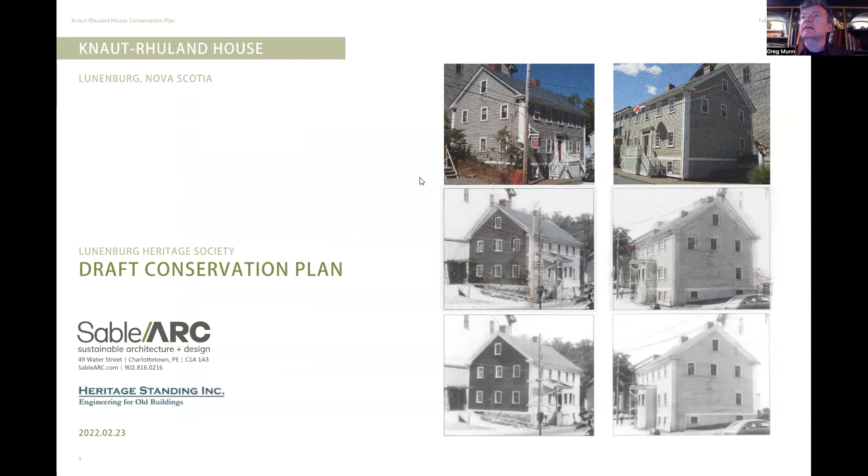We're going to go through our objectives and methodology, and briefly the format of the plan, and we are going to focus on those items that we have discovered in the house that could require repairs, restoration, even some new construction. We also have some programming ideas that could potentially better fulfill your mission and vision. And the treatment alternatives are those items that are not specifically about maintenance of existing conditions of the house, but are added treatments to consider in the future.

And then we are going to present initial cost estimates, and I will just put out a word of caution on these numbers. We are still working on the estimates. It's an estimated estimate at the moment. I've bumped the numbers up just a little bit, so if the final numbers come in better than what they're showing, that's great. If they're kind of the same, it's always a shock to see prices and costs of things. But it's a work in progress, so take that with a grain of salt. We will have that tightened down a little bit more when we present the final.

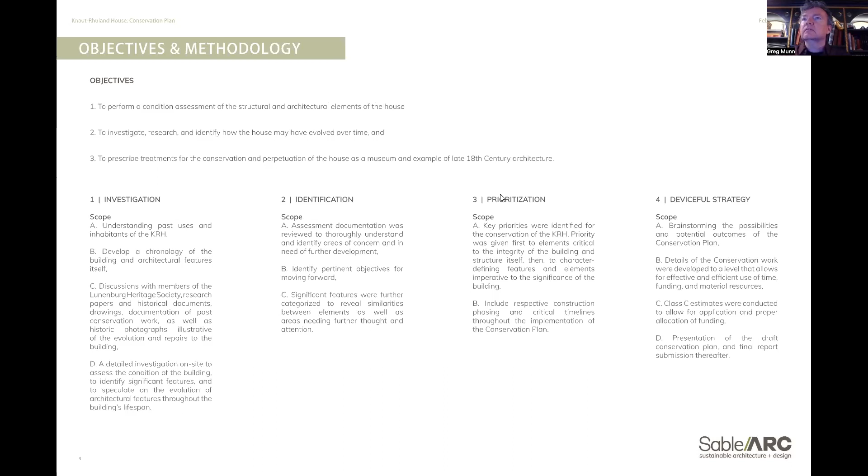And when we evaluated the material of the house, we have this developed rating system from excellent, good, fair, and poor. So those items that were in poor are, of course, the high priority items. I think that's all I need to say, that's pretty self-explanatory.

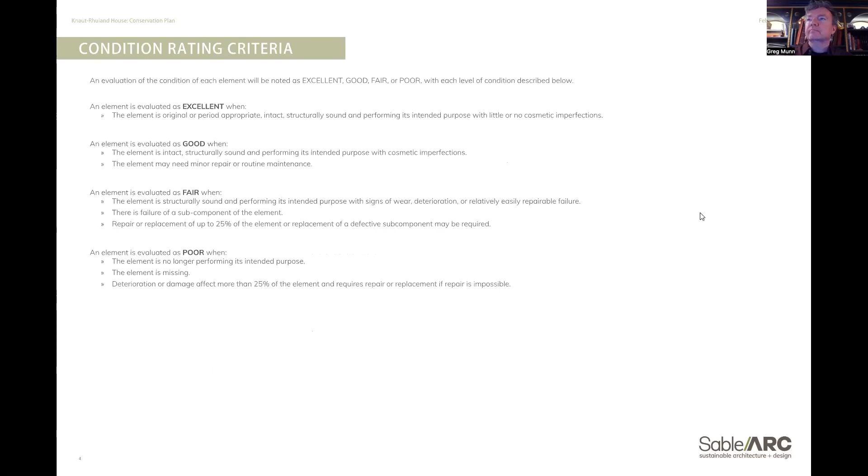This is the overall report. We have the project background and the methodology written out, and you'll be able to read what that is about. There was a lot of background to put into this report. We have the history of the house, taken from the two previous reports that were done several years ago. We also have support material, the Venice Charter and the Parks Canada designation of the house, identifying the historic features and the reason that the house is a listed designated historic property.

So from that, we go into the report of the condition assessment, and we look at the site, the exterior of the house, and then we go room by room. That is not part of the presentation tonight, that is again in the report, but it's a description of what is there right now, talking about such things as on the interior, floors, ceilings, walls, trim, doors, like every type of material broken down and then assessed for condition.

And then in treatment and use, that is where we have the condition assessment. As I mentioned, we assess the condition of each of those elements in each of the spaces. And then treatment and use, there's programmatic considerations, talking a little bit again about the vision and some things that could be part of a reparation or a restoration. They can go in a couple of different directions depending on how you see the museum moving forward in the future. This report is primarily about the condition of the building today, but it really starts to ask those questions about what you want to see, how you see the museum tomorrow, and maybe start to put into place some planning and strategies to evolve the property.

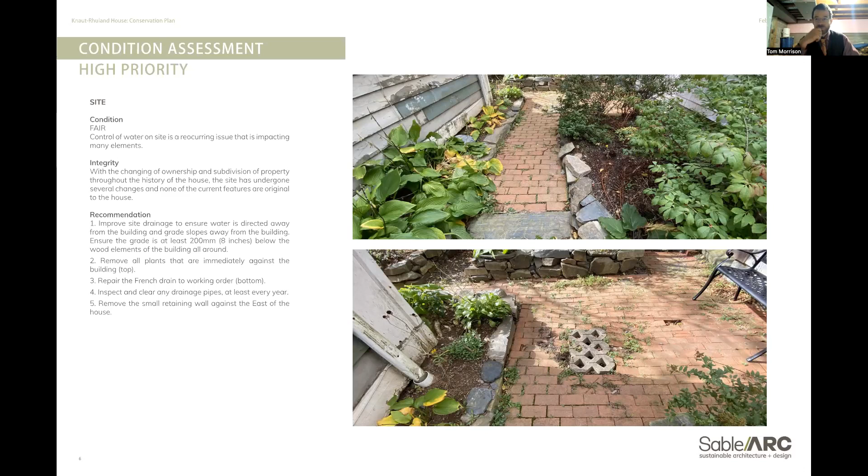Yeah. And this is further to your investigation, Tom. So if you want to keep going with this part.

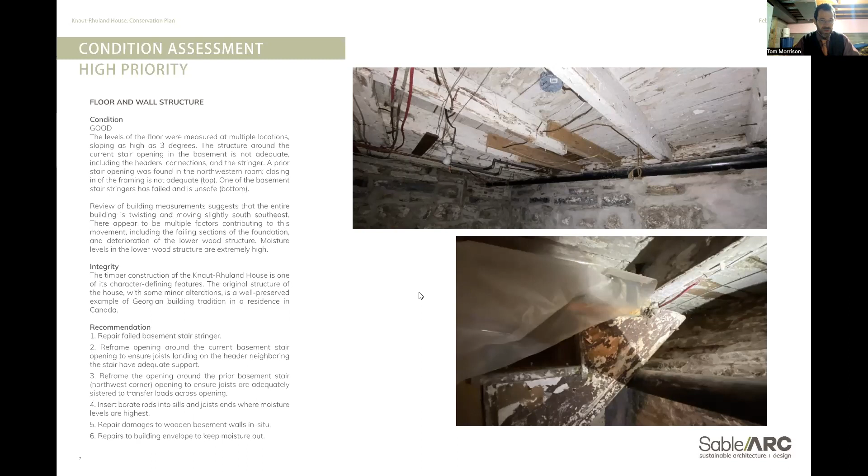There are some questions that fit into what Greg and Monica are looking at on this vision, reflecting what you're going to want to do, and how that space can be used, so you can most practically address it without impacting any of your value. Same very much for that lower picture, where one piece has failed - it's an issue, it has to be dealt with, but it's not a big worry in my mind, just something that has to be fixed. I think the slides you prepared, the next one has a bigger discussion point - oh no, it was the masonry further along, sorry, I got them mixed up.

Similarly with the roof structure down through the buildings - when I was going through it, I could notice there's a bunch of movement and different stress in the roof. I actually do the opposite - Greg and Monica, I often start at the top of the building and work my way down. There were little things like the fact they had adjusted where this chimney was located at some point in the past, and they'd cut through the prior rafter. So something should be done to make that work properly.

There's a bit of patching around it, but when I look at the wood, there's more stress on it than there should be. Considering how easy it is for water to get in at different joints, and movements in the roof causing wear and tear, you don't want to just leave it - it's better to fix it, because that will help your other things work better. The other stresses in the roof were suggesting something odd, so we spent some time mapping it out and looking at different theories. It also matched very much what we saw in the basement, which maybe is the next slide.

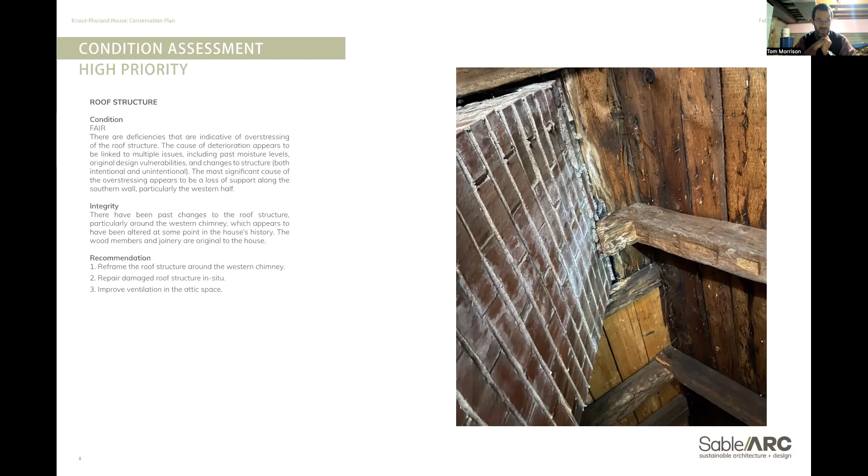There's not a whole lot of support in one corner of the building because the foundation walls more or less failed. Looking through the foundations, we'll start with the obvious one in that front corner. The stones are moving out, things aren't being held properly where they should be. It leads to that wall in the basement not being supported properly, so that wall starts to drop down.

And because a whole building works together, it doesn't always work how you intend it to, or how it's designed to, but it all ends up working together. So when that wall starts wanting to drop, the roof structure starts trying to pull it up, and that causes your roof to twist, and causes all these weird movements throughout the building.

So our dominant theory is that most of these issues are fairly related, and you just need to start by making sure there's something solid at the bottom. That's going to be a continuation of prior masonry work.

In the other areas there were some questions. It would be worth monitoring what happens with the other foundations, because there's a different way they repaired it, and when they did it, I guess that was last year. If monitoring over the next few years shows it's great, then no problem - there's no point undoing anything.

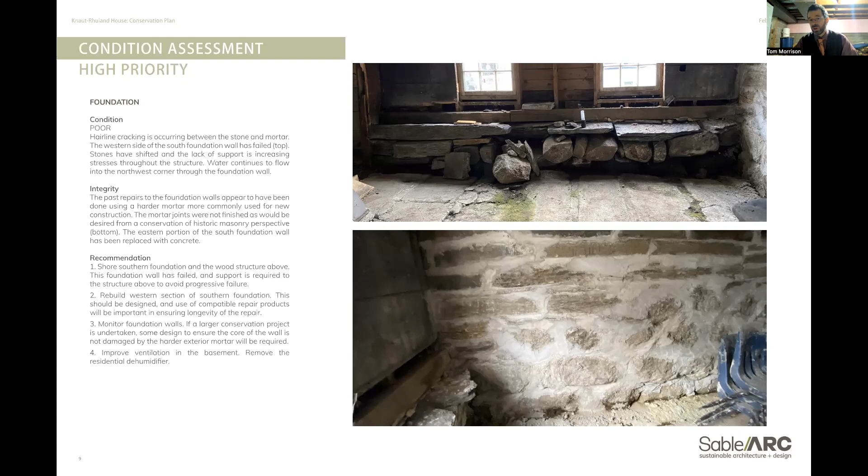The extent of the wall there that needs to be done isn't huge, and then the other areas will take bit by bit. I think that covers the main point.

People are free to interrupt me too, because I never know how much detail to get into. And I could talk for hours just on a masonry wall and probably bore most people to tears while I would be thoroughly enjoying it.

Greg, did you want to talk on chimneys, or were you thinking I would chat on that? Oh yeah, you go ahead on chimneys as well. Okay.

So just looking through the chimneys, again establishing what's going well, what's not. In that lower room, I think there's seen as a lot of potential, and I would tend to agree from my experience - there's a lot of potential for how it could be used.

The main fireplace has been bricked up, the masonry had taken quite a beating. So this requires a little bit of a careful touch to get the full value and benefit of the space you could create there, and seeing what's possible really.

In some of the upper rooms, some of the lintels were starting to corrode. There's some movement around stonework. Sorry, the lintel being that metal bar Monica's showing - thank you, Monica, it's just a metal bar put across.

That suggests to me these fireplaces have been rebuilt a few times, because the type of metal that appears to be used isn't something that would have been in use for the period of the house. Not necessarily a big deal - every house is a bit of a changing story, but just something to be aware of.

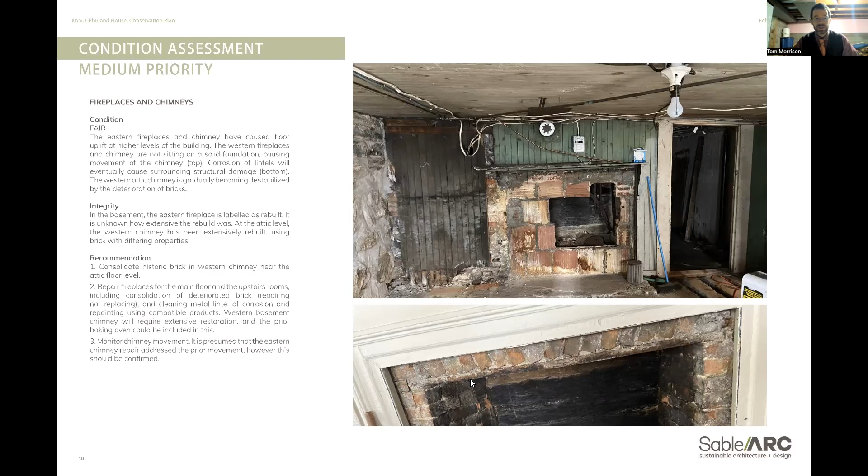So as you repair it, these are little repairs that you can address as you go to make it operable to meet your needs. I think that covers the main points. I don't want to take up too much time here. Yeah, no, that's great, thank you.

We will get back to talking about chimneys when we talk about the kitchen in a few minutes, and we can start talking about the potential to restore those chimneys to working order.

But we're going to go now to the exterior of the house. It's quite obvious to see, but it's really fun to see these up close photographs that the clapboards, for instance, on the front of the house, the south side, have been replaced in recent years, but the clapboards on the two sides and the rear have not.

None of them are original to the house. There just wouldn't be any that would have lasted quite that long. One thing we noticed is that the clapboards on the front have a narrower profile than the clapboards on the sides and rear. So the to-weather dimension there is different.

So what we have done is we have added cost into the estimate to repair the clapboards. At some point they will have to be replaced, as in any house with shingles or clapboards, and at that time it's recommended that they all have the same profile.

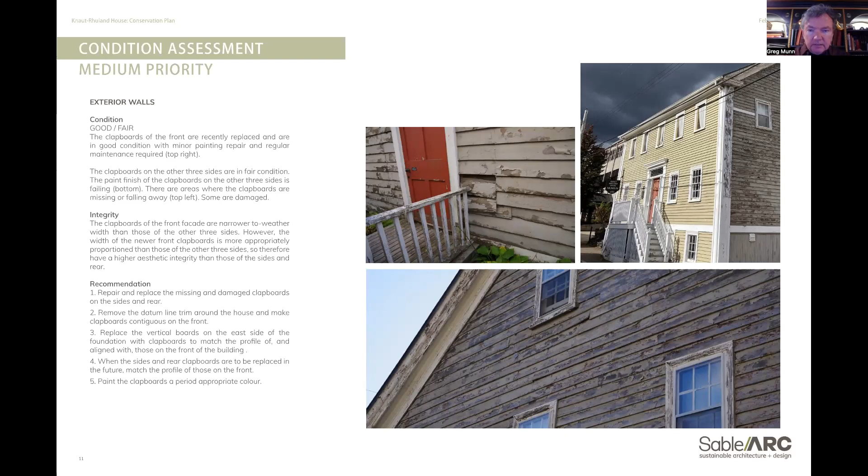And of course, that would be great. I'm all about historic color, so it'd be nice to research some historic colors for the exterior.

So then we go on to the trim. I will say these are some examples that are in poor condition. A lot of it needs work, it's better to repair than replace, but you can see some of those corner boards need to be replaced. The eave returns at the top there with the bracket seem to be in good enough condition to be repaired, but they should be repaired sooner than later.

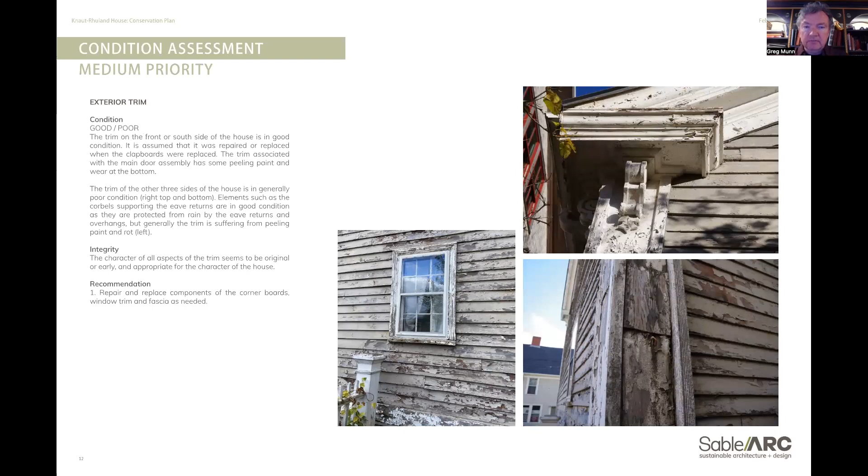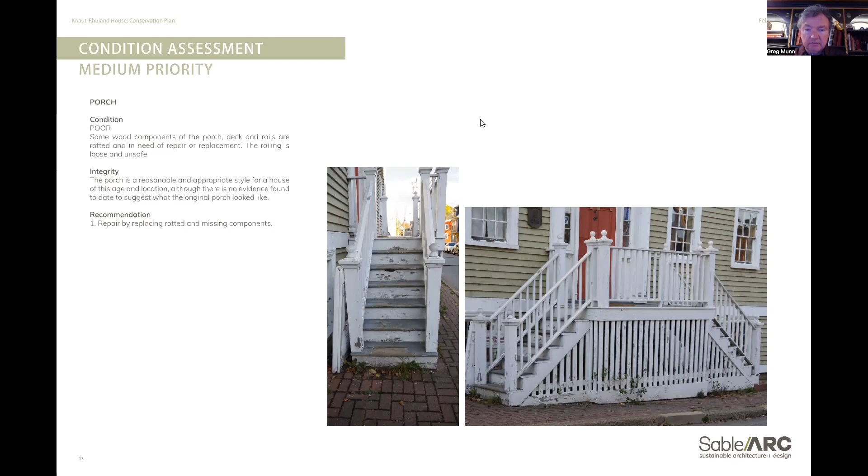And then on the porch, there's just some loose pieces, some rot. We don't have records of exactly what that porch looked like, but it was probably pretty close to this. So that's quite good, but it is loose and needs some repair. There's just some rot there.

Again, we're going over these elements quite quickly, but on the interior, we looked at the drywall over top of the plaster walls, and just for authenticity's sake, it would be a nice idea to remove the drywall and the pegboard, and maybe have some displays in these rooms that do not cover up the walls.

But this would mean repairing the plaster, and I would guess—we of course didn't look behind the drywall—but it was likely put up because the plaster was in rough shape. We have pricing in here for plaster repair, and it could be a medium priority idea.

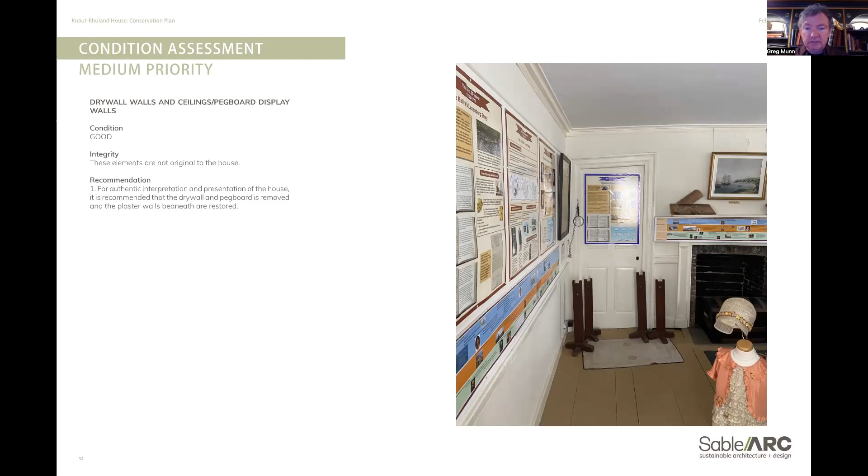I want to say overall, the house is in quite good condition overall. These are just things, a lot of them just things to keep up on, maintenance, like the exterior items that once they start going downhill, they go downhill quickly.

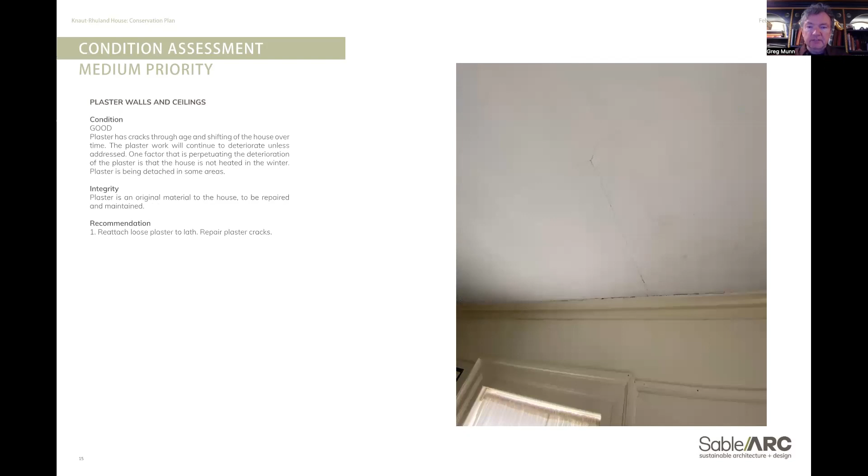And the plaster again, there are methods to reattach any loose bits to the lath above and cutting out the cracked bits and repairing, just to keep it from deteriorating.

So, mechanical system. There's baseboard heaters hither and yon throughout the house, and currently the house is not heated in the winter. We highly recommend that you put in a program to heat the house through the winter.

This is contributing to the cracking plaster, the plaster loosening from the lath, and also the subsidence of the house itself. It needs to be kept at a steady temperature, it doesn't have to be high.

You don't have to open the house or make it comfortable for human presence, but it would be a good idea to keep the house heated through the winter. We have a mechanical engineer consultant on the team, and of course we don't want to touch any historic fabric if we don't have to, so ductwork is out of the question. Where would you put the ducts? You don't want to build chases or knock holes into things.

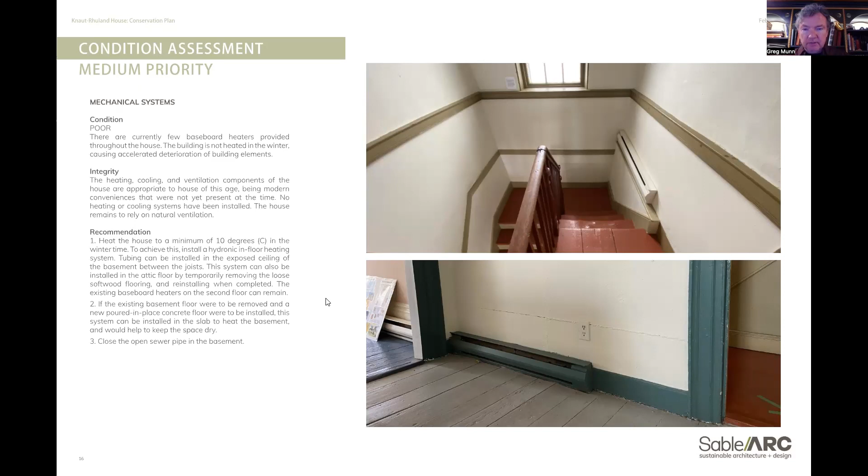You have an exposed ceiling on the main floor from the basement side, so you could install the hydronic system between the joists on the main floor. In the attic, you could also have it in the floor—those loose boards, you could put it in those spaces.

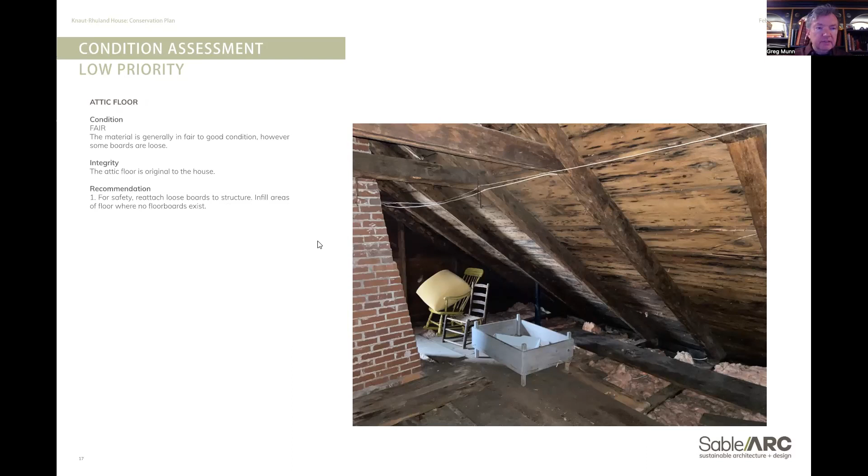So that is an idea, and there's more to that—other related sections we'll get to. For the attic floor, it's just some loose boards up there, and we'd suggest there would be some repair to that floor.

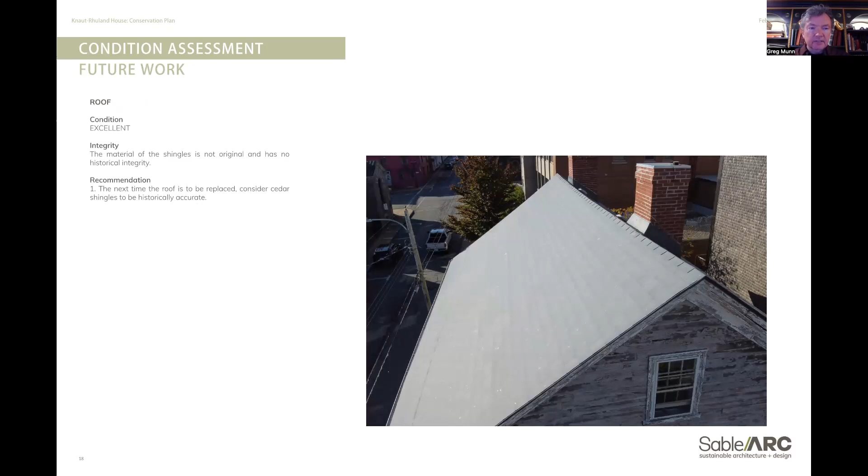Oh, we have the roof in here—it's showing that it's in excellent condition and quite new. It's going to be very efficient for a very long time, but just as a recommendation, someday it will need to be replaced. It won't be for a very long time, but it would be more appropriate to have a cedar shingle roof on there. That's all that's in there for.

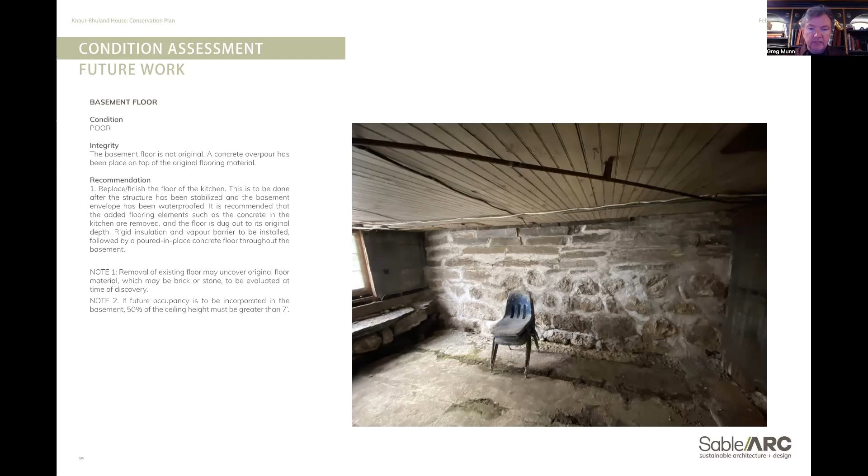So in a way, I believe it would be appropriate to strip away some of the layers in the basement if you would choose to restore the kitchen, for instance. One thing would be to get that floor out and put in a new one at the appropriate level. That would mean hand digging something out there, but again, putting a radiant system into it.

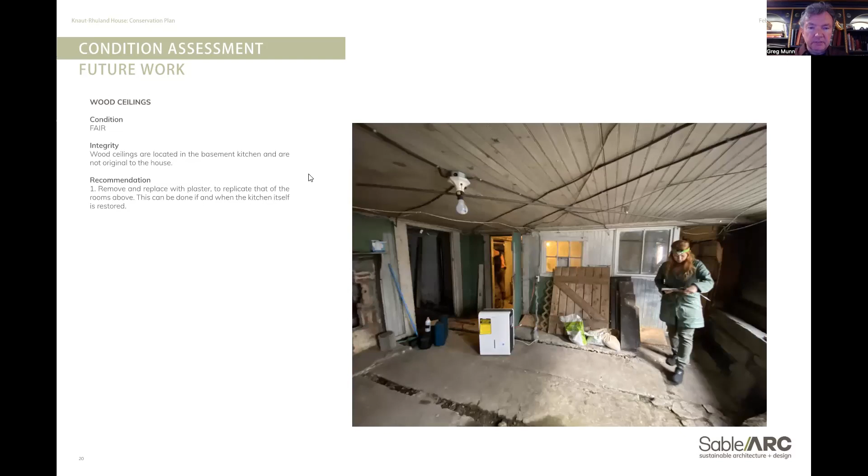And the wood ceilings, this is not an original finish here. It was most likely a plaster ceiling, and there's likely evidence of that. But that's all part of the idea to restore the kitchen, which we'll get into. Pulling that ceiling down also exposes the structure to put a radiant system in.

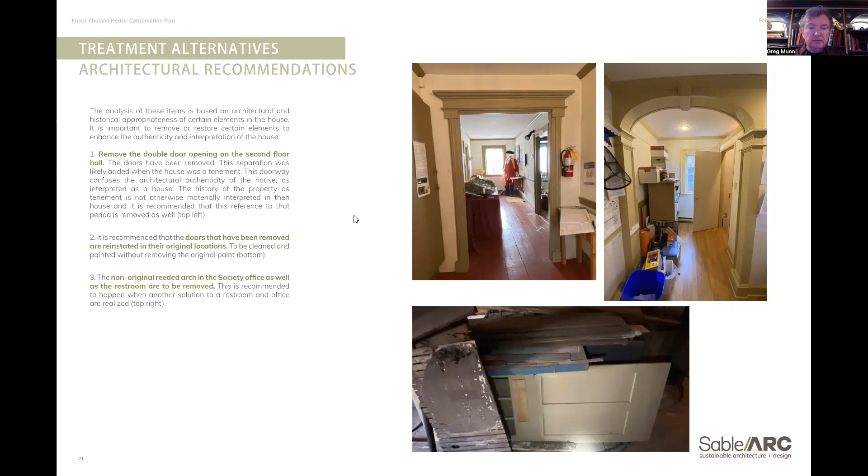And for the sake of being more authentic, we recommend you consider just removing that doorway - though you could leave it to interpret the house as a tenement, if that's part of your mission. But if the thought is to bring this house back further, this is another item that confuses the story. At the bottom, there's the stack of doors in the basement, and I believe they were removed to allow a better flow through the house for visitors. But our opinion is to put them back in - if the house is heated, it would help zone the house and keep the heat in certain places, since the house will be drafty. There was a reason for the doors in the first place: to zone the rooms and hold the heat. It would also enhance the experience for the visitor.

So we're going to go through some of these architectural treatment alternatives. The idea was floated when we were first there, if the attic space could be potentially usable space, either as an office or better storage. We did National Building Code research on this: a two-story building used by the public can have one stair, which is what you have up the center. When you go to three floors, you need two stairs for the whole house. That would mean building an emergency exit stair on the exterior of the house, likely on one of the gable ends, turning a window into a door, and you would also need a door from the second floor out onto that stair. That's a lot of change just to gather some square footage in the attic.

It can still be used as storage. The other issue is the current stair that goes to the attic - a lot can be forgiven, but that stair really is not safe for daily use. If you're careful moving things up the way it's used right now, that would be all right. But really, you would need to build a second stair, probably somewhere inside the house, to get from the second floor to the third, and that would be incredibly obtrusive to the house. So we recommend letting go of the idea of using the attic - it would end up changing the house and trigger a whole lot of costly work that would be detrimental to the character of the house.

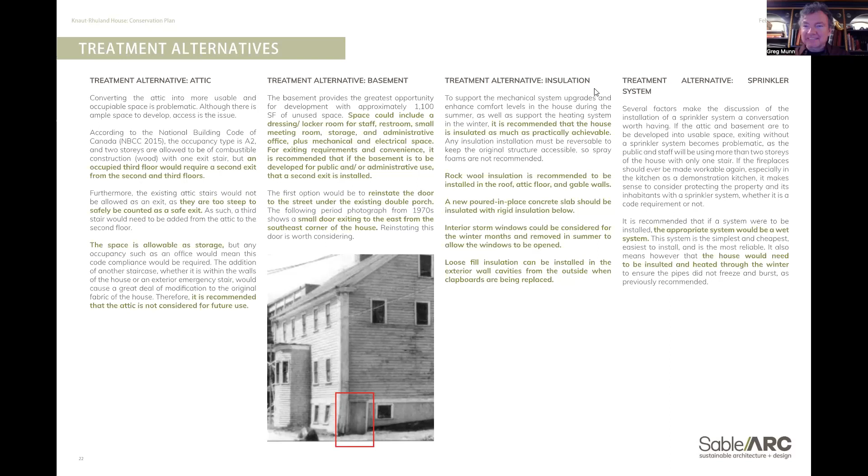That's part of the reason why the wet system is actually the best, because there's the fewest parts to go wrong, and they are incredibly reliable.

Okay, so here is the wow factor, the wild one. You have that little tiny yard to the side, and for programmatic purposes, you could get out of the house altogether and build a small little building on this location.

I put a 3'4" alley in there - that's probably a little too narrow, but in Lunenburg you can build up to the property line, and this could be a 2-story small little building that could have meeting space, gift shop, public restroom, administrative office - all of those things stacked on a couple of floors.

And having a walkway that goes to the back, it could exit out onto the back at ground level. It would step back from the street a little bit to allow for that door into the basement of the house, if that were still desirable as well.

It would not be appropriate to add on to the house directly - you want it to stand as it authentically always has. It would also be frowned upon to make this building look historically accurate. But it would take its precedence, its inspiration from the house, and be something that is 21st century, but also respect and support the architecture of the house itself.

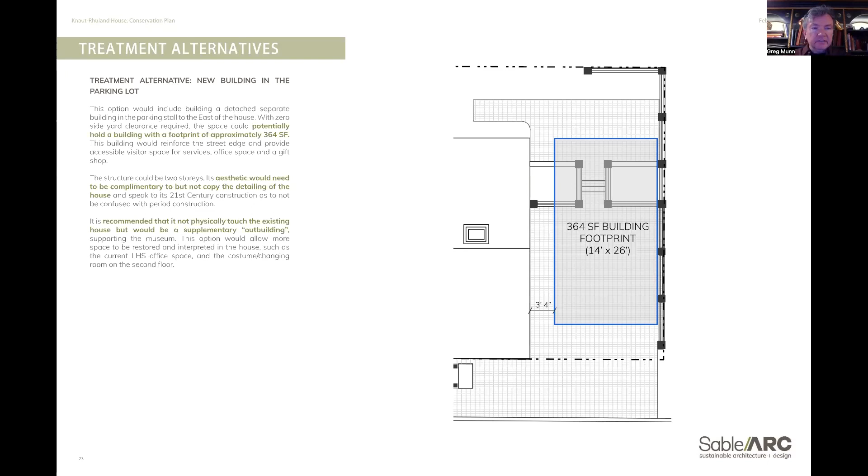So you've actually thrown a cost into there, from small renovations to the ultimate of what you could do here. So that is what we've added. So here's the fun part - this is the cost of everything that we have there.

Again, these numbers are - I will call them preliminary. There's some research in this, but we are going to be confirming some numbers and actually calling around trying to get some tighter numbers on these. Some of them I'll say are a little higher - hopefully I try to err on the side of expensive.

But I'm not sure if we want to go through all of these items. Maybe I'll just do the overall costs of the categories.

I'll add the comment that I find with the projects we work on, whenever you're getting into the specialty work in the Maritimes, costing is difficult. We're seeing, say, federal projects, they have to cost to a really high level of degree. There's only 2 companies in the country that do the costing, and they can't cost work in the Maritimes. So these numbers are good to budget and plan on, and it's hard to know for sure how some of this will play out.

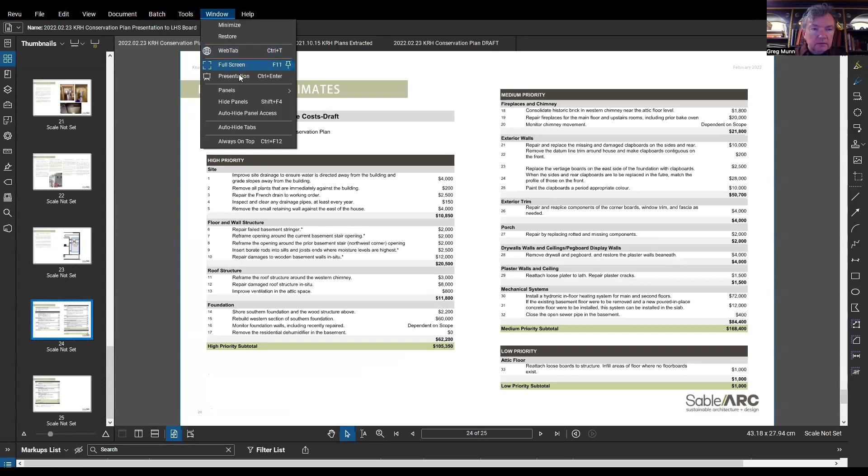Monica, can you go back to the first page that has the structural items, the high priority stuff—especially the foundation, for instance. Some of these items are covered under the application for funding that's coming through right now, and some of these things are priced to be done this year, so those prices are probably going to be the most accurate. Everything else is going to be a bit of a wild card the further out. It's almost impossible to price something you might want to do in five years—much harder than it ever has been before, but it's a stab at it.

So really, to get this building, if you look at the numbers bit by bit, it's very doable, but it's also going to mean finding the right people to do it. In any case, whether it's new construction or restoration, it's very hard at the moment to find people. But this is everything, and what we think at the moment. It would cost, if you had all the money you needed and wanted to do everything at once—this is it. So I think that's what we have for the moment.

There's a lot more support information in the draft report, of course, but how are we for time? I haven't even been watching. I think we're right on an hour right now. Oh yeah, okay, sorry, I drag on.